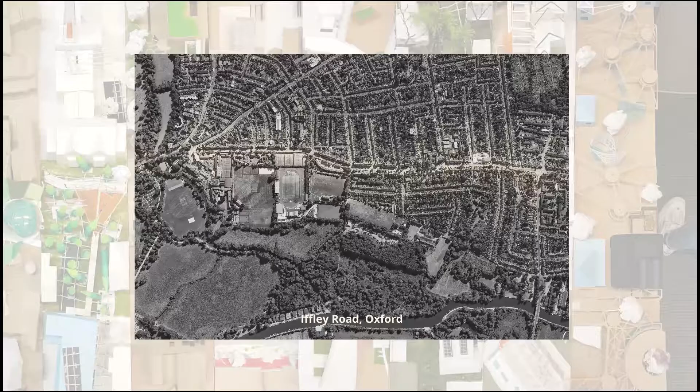Our studio topics often revolve around such sustainable issues, and we try to incorporate these values into our projects. Our project last semester with the studio mainly centered along Iffley Road. There was a week on the theme of festivals, while some other weeks encouraged a greater emphasis on more hands-on approach with physical models to develop our designs.

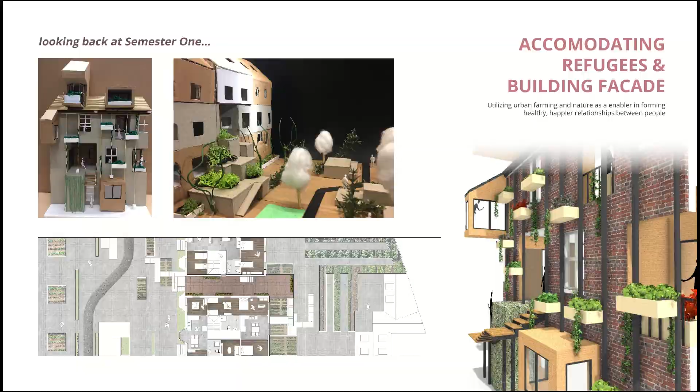Throughout my projects, I explored the recurring theme of using nature to break down boundaries, and I believe there is much more value that nature can bring into reconciling the problems we face in the world.

The main purpose of my project is to allow for us to reconnect with nature and acknowledge its presence as a necessity for all. Our existing architecture has been created to protect us from nature, but it has also caused us to become detached. I hope that architecture can help to blur these boundaries to help us learn to appreciate its importance in our ecosystem.

There are so many reasons to why our relationship with nature needs to be established, both emotionally and physically, especially so when our state of mind is pivotal in our pursuit for happiness and satisfaction.

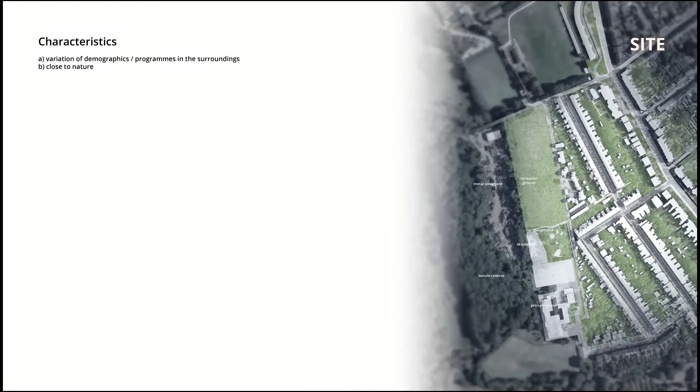I started by observing what happens in the natural world and to see if such relationships can be applied between humans and architecture. I had picked a site with certain characteristics, such as its proximity to nature and having a diverse group of people and functions.

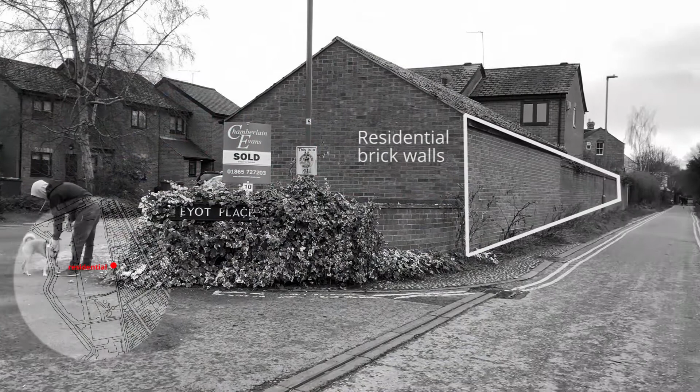Nature grows well without human intervention in abandoned places. Ironically, I start to find similarities between scrapyard pieces and nature in a way that this messy chaos may be where distinctions between items and places seemingly disintegrate and blend together.

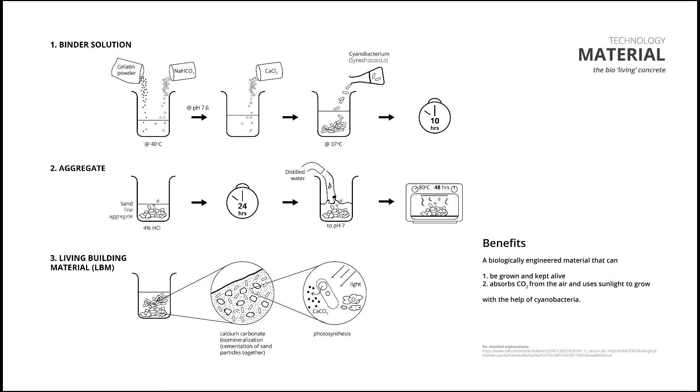Could we blur the boundaries between the different functions? I wanted to utilize a kind of living material for my project where bacteria can be building materials that eventually live together with us. This has been a source of inspiration towards the organic forms that indiscriminate the floor, wall, and roof. I had hoped to achieve similar spatial experiences where surfaces continue from the interior to the exterior in a discrete manner.

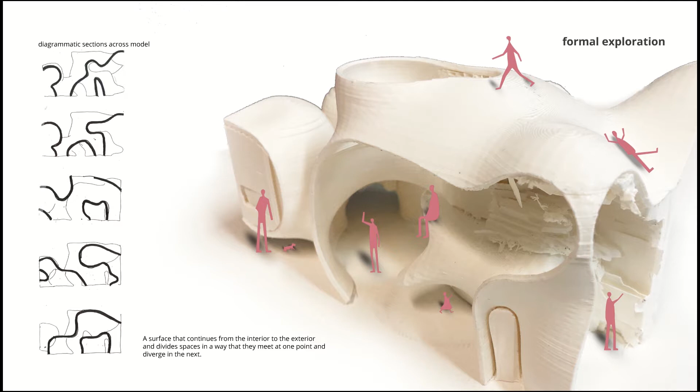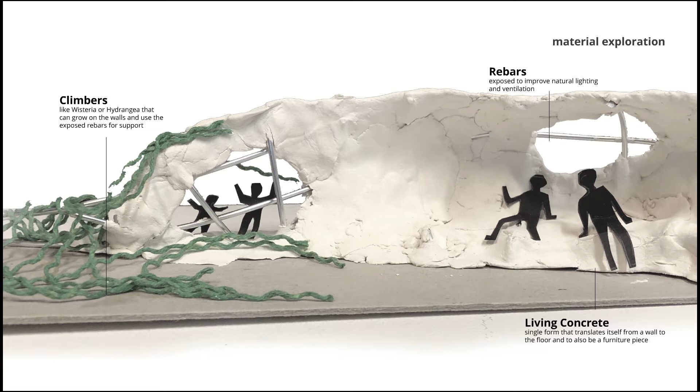These are the initial vision images I created before designing my actual architecture. The journey linking two or more functions is like an exploration through light and dark, with an eventual feeling of discovery. Parts of the living concrete structure can be exposed to decrease the overall mass while at the same time allowing nature to occupy these areas that the material did not cover.

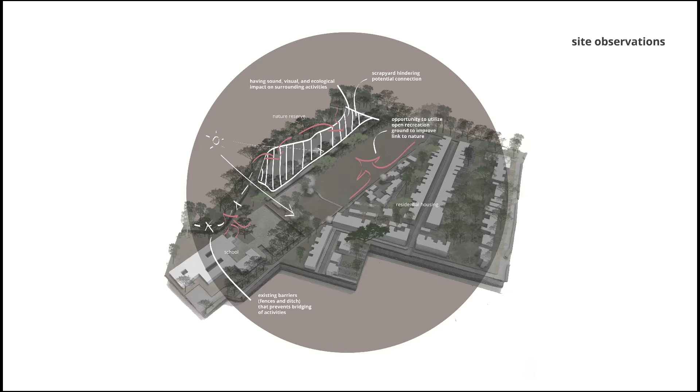The current site presents an opportunity to utilize the recreation ground to make connections. The scrapyard is moved as it creates ecological and sound impact to its surroundings. The proposal brings about increased links and mixed activities for improved relationships between human, nature, and its context.

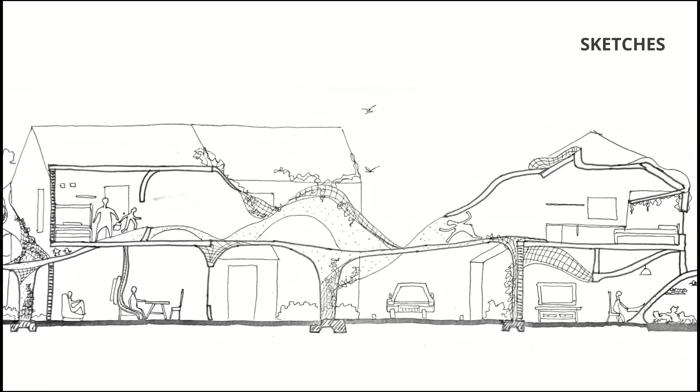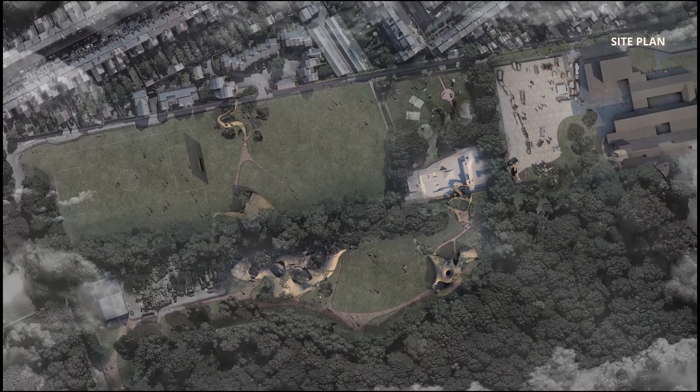These sketches explore the porosity of spaces and where to leave the structure exposed for plants and visual connectivity. Lives at home can be different when architecture and nature can open new pathways for connectivity and cohabitation with living organisms apart from ourselves. This is a site view of the proposal where some part of the architecture is hidden in the trees while others break through and reach to other areas.

The residential linkway here is designed in a way to encourage residents to spend more time outdoors.

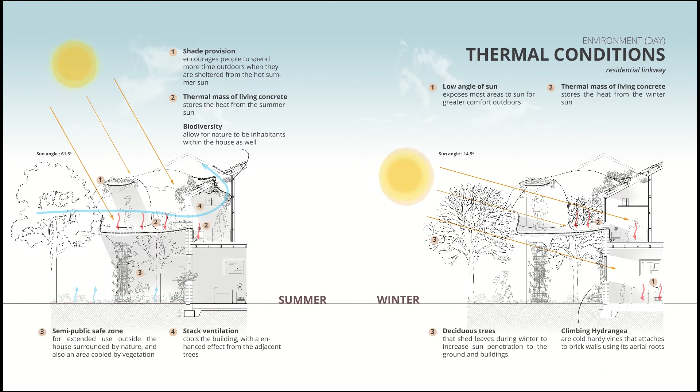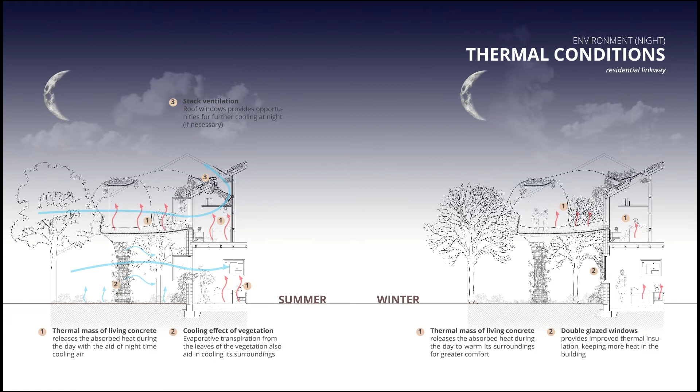More importantly, the living concrete can have the ability to store heat both in the summer and winter so that it can be released later at night when it's cooler. This creates an undulating and flowing surface for children, or a learning space that transforms its mood in the day to the night.

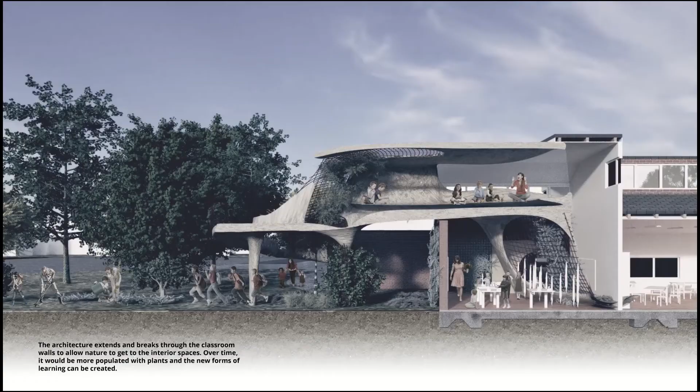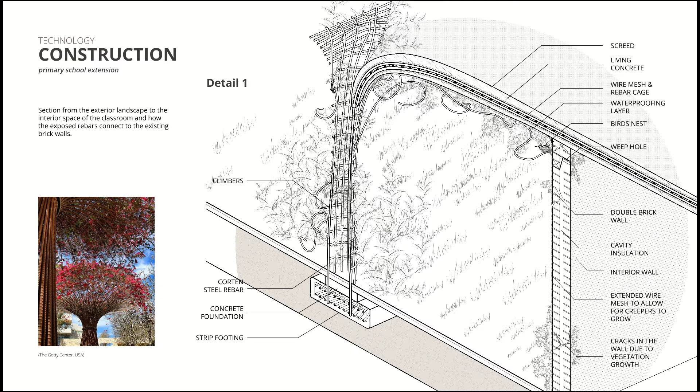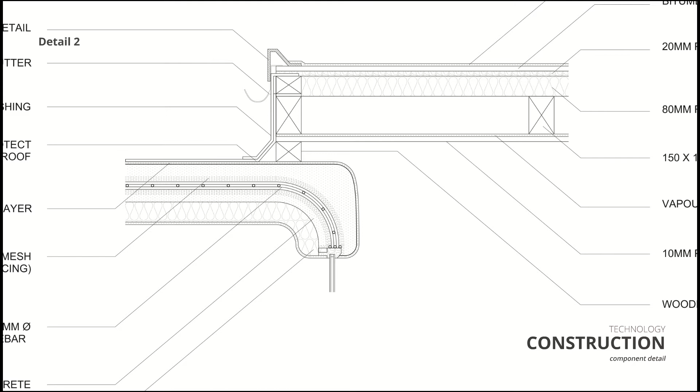The architecture breaks through existing classroom walls and lets nature creep into the interior spaces and open up the typical four-walled classroom. In the process of the living concrete entering the classroom, it creates chances for wildlife to also coexist along the walls. The second detail tests the connection between the existing roof of the school and the proposed intervention, the makeup of the material, and how Corten rebars are connected to the window wooden frame.

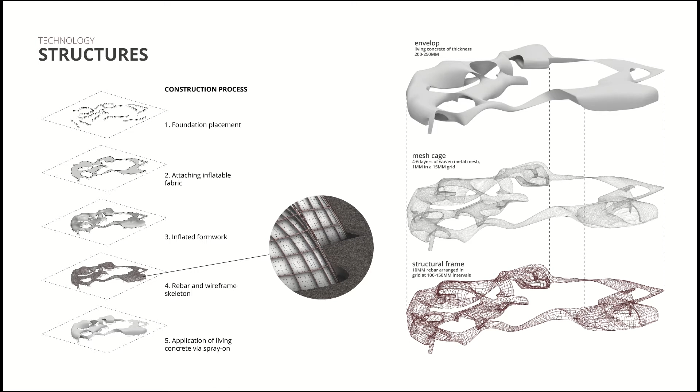The construction process is an adaptation from that of binishells and ferrocement process, when inflated formwork is used as a support before rebar and wire mesh is built.

With such an organic, free-flowing shape, I wanted to analyze its performance. I adapted the original properties of concrete and changed its compressive strength to that of living concrete. It was shown to have rather low deflection value in general.

I presume it performs rather well because of its shape and that helps to transfer loads more evenly, except for a few areas with longer spans where larger thicknesses for support is required. In this clip, you can see how these weaker areas deflect under more intense load stress. The principal tension compression diagram also shows that areas are largely in compression of which concrete is capable of handling.

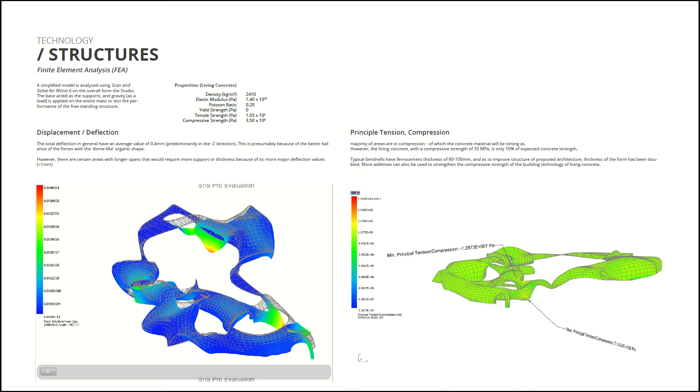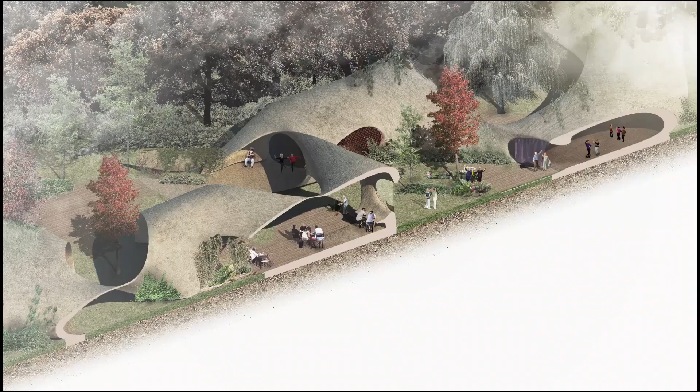The final imagery of the studio expressed how people and architecture can adopt a very free-form way of movement through architecture with the help of nature. People dance between the trees and across different functions to allow for more organic expression of themselves and for better relationships with their surroundings and environment.

I hope my project has allowed for us to imagine how architecture could be perceived in a new manner that welcomes nature and the possibility of how coexistence can improve our entire ecosystem.